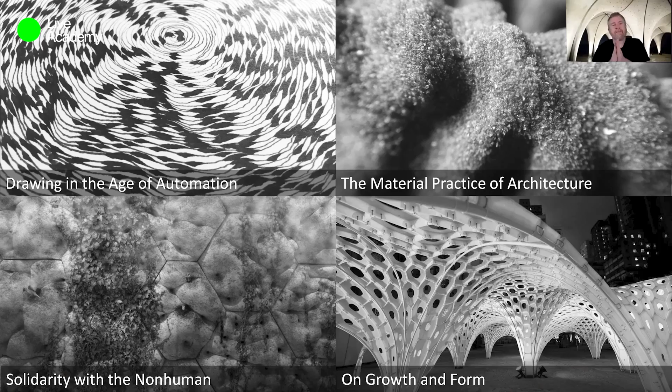So my lecture is divided into kind of 4 chapters that document some of my work over the last 15 years. So for each of these topics, I'm going to try to trace a disciplinary concern through my teaching and my professional practice.

And try to trace how my ideas have changed over time, often due to collaborations with people like Riyadh, or conversations I've had with my colleagues or students. So I'm going to start with drawing in the age of automation. I never would have predicted that I'd have anything to say about drawing.

25 years ago, when I was first starting my first architecture degree, it was actually my lack of drawing skills that pushed me towards computation. Compared to my peers, they were all able to draw fantastically well with a pencil or pen, and I was incredibly sloppy, and my drawings were always wrinkled and smudged, and no matter how hard I tried to draw cleanly and beautifully, I felt like it was a disaster.

At the time, there were like 3 computers in the basement of the architecture building that I was in, and I saw maybe a way through computation that I could catch up with my peers, that I could have cleaner drawings and things like that. And it was interesting to go through that process early in my education, and now be returning to drawing over the last few years as a way to think about how I teach parametric tools, but also how I can think through different computational ideas within my own work.

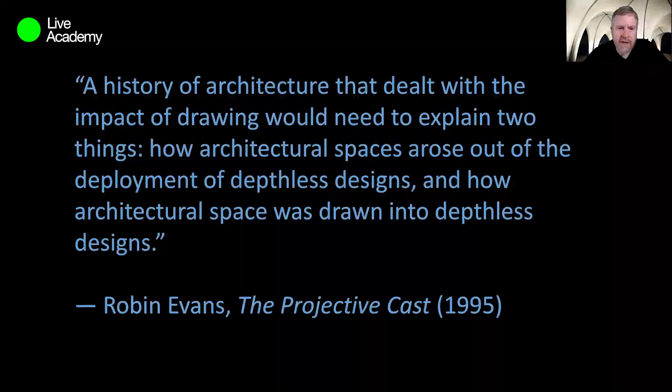So for hundreds of years, the way that we worked was primarily through the parallel space of projective drawing: plans, sections, and axonometrics. And that tension that Evans is talking about was the primary tension of our work, that drawings allowed a certain abstraction that let us deal with higher level ideas within a project, but at the same time we had to collapse all of the complexities of architecture, of view, perception, materiality, light, all of that into the 2D drawing as we were working.

With the advent of CAD software in the last few decades of the 20th century, I'd say the fundamental act of drawing was relatively unchanged despite the new and different tool set. Basically, using AutoCAD didn't really add anything. It made drawings more efficient, so you didn't have to redraw a drawing when you made a mistake. You didn't have to erase things in the same way. But it didn't really change, I think, the fundamental thinking behind drawing.

But only as digital modeling and more recently building information modeling have become the dominant methods used to design architecture, has architects' relationship with drawing radically changed. After centuries of drawings being the essential mechanism to generate and critically engage architecture, we're at a moment where drawings might exist only as an output of production, if even that. Within a model-based design paradigm, the construction of drawings has either been bypassed altogether or been uncritically outsourced to algorithms. What I mean by that is, maybe we still have to produce drawings, let's say within a Revit model, but the drawings are being produced by an algorithm that we're not really critically engaging.

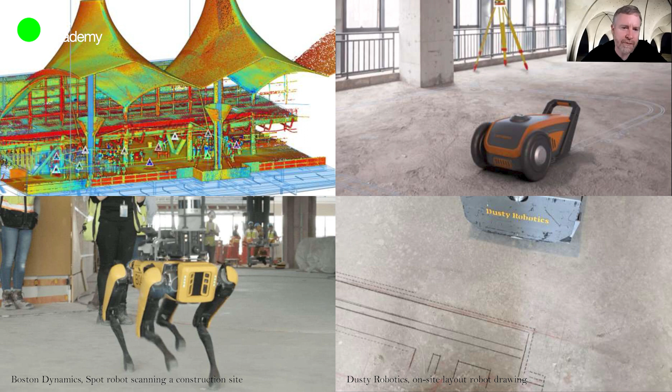So in this void, what is the agency of drawing within the discipline? In other words, why do we draw, or should we draw? Freed from the complex historical relationships between drawing and building described by Evans, should we simply create buildings without drawings, as many have suggested? Or might the very technologies that have enabled this freedom be re-examined for their potential to critically engage drawing as a generative and creative act?

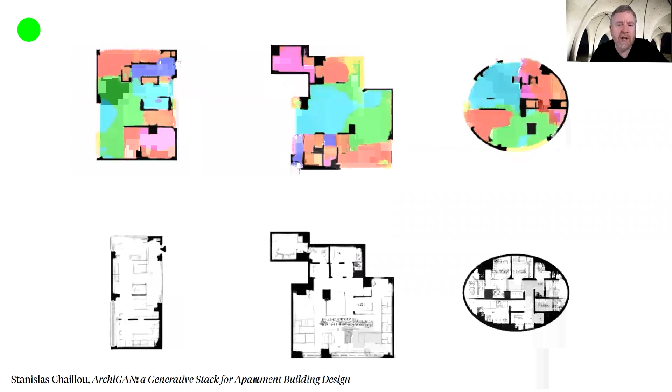So before we get into how the profession might re-engage drawing in relation to computation and automation, I think it's necessary to back up a little bit and talk about the ways that different academic institutions have engaged drawing through the prevailing pedagogies of computational design. So if we work through these, I think it's precisely the frustration that I have with these pedagogies that has led to several of the projects, which I'll show in a few moments. So I see 4 primary ways in which computational design is taught in universities today.

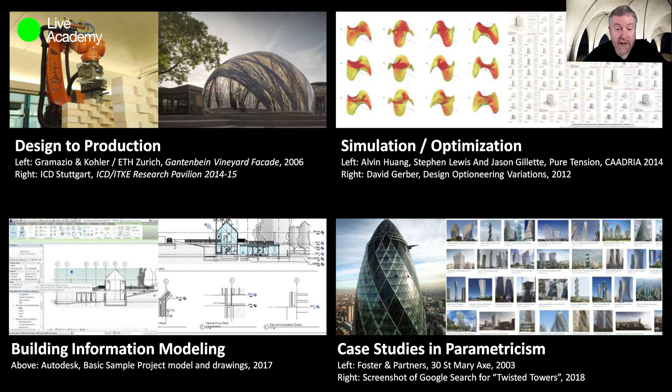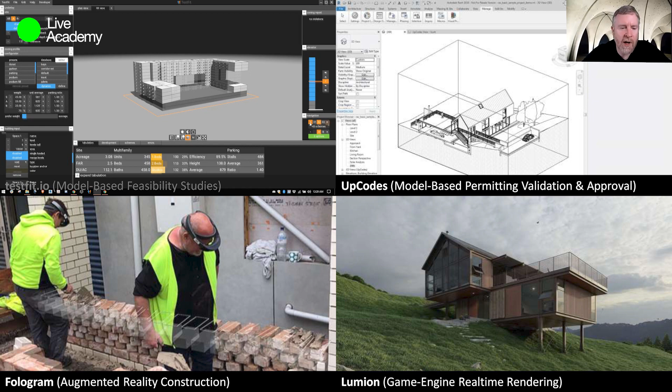Moving on, in the lower left, Fologram is developing augmented reality-based tools that could one day eliminate a contractor's need for drawings. Rather than contractors referring to either digital or physical drawings, they will be able to virtually see the building's model on site. And then finally, game engine-based rendering platforms like Lumion or Twinmotion, which through their speed and realism have become the go-to tools for communicating with clients over far more abstract drawings. So again, why do we draw, or why should we draw?

And how might drawing be productive in the age of automation? So Kelly Bair, one of the contributors to the first volume of the Drawing Codes show, which I co-curated in 2017 with Adam Marcus, has discussed how drawing, rigorously and intensely pursued, maintains a sense of surprise and innovative discovery. Quote, "The drawing becomes a catapult for invention, leaving behind the expectations of convention, buildability, or financial burdens.

Drawing is a proto-document of something that is not quite finished, an act still underway in the eye of the author." In this respect, drawing might capture the abstract logic of an idea better than any other form of media.

About 9 years ago, I changed my teaching methods for computational design from one based on famous case studies in contemporary architecture to one based on case studies from mid-20th century art and computation. This was based on a conversation that I had with a student who, when I suggested that he should use Grasshopper to complete a part of his project, told me, "Oh, I never learned Grasshopper because I don't like twisting towers." At that moment, I realized that my computational design pedagogy had failed to convey the rich capabilities of the tool, and many students simply thought that the tools were only important if one was interested in parametricism as a style.

I was actually coordinating the curriculum, and I knew that all of the students had already gone through a series of classes on digital modeling, computational design, and so forth. So to have a student say, "Oh, I never learned those tools because I wasn't interested in a particular style," although I was sad for that student, I also realized it was actually my fault that I had not conveyed the importance in the proper way. I thought that if I and other faculty members taught, like, "Oh, here's this cool twisting tower," they would all see the value of the tools based on that specific case study. And many students were simply turned off by the tools because of the relationship with certain types of architecture.

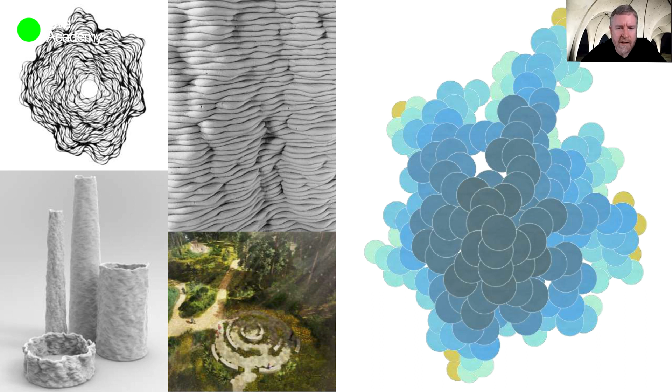I've used this particular computational sketch over the last 3 years to make robotically drawn ink drawings, ceramic 3D printed vessels, concrete benches for a forest cemetery, and a proposal for a rug for Louis Vuitton. In the same way an architect might return to a parti diagram repeatedly to mine new opportunities, I try to mine the generative capacity of algorithms.

So for that Drawing Codes exhibition that I mentioned with the Kelly Bair quote, in addition to co-curating the exhibition, I also contributed a drawing myself. I was developing the drawing in the tense period between the 2016 election and Trump's inauguration in early 2017. And I wanted to explore in my contribution how I could use computation to help generate and represent a counterfactual walled city.

Trump's constant ranting about the wall was chilling, disturbing, and reminded me of a medieval warlord. Obviously, the wall is an architectural device traditionally used to divide people and territory. Trump's talk of the wall reminded me of these maps of walled cities, and I began to wonder if I could script a wall to simultaneously become territory and city. So rather than dividing the city from the territory, how could the wall be simultaneously both of those things? What could a city look like if it was wall and nothing else?

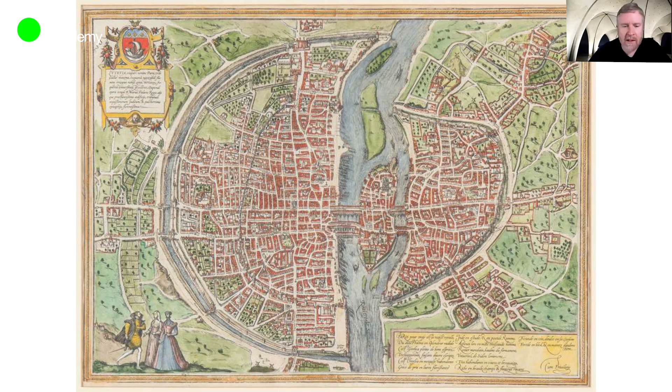I've been fascinated with walls that have grown thick enough to be buildings in themselves. So I started a computational sketch that slowly increased the wall's length while preventing it from moving outside a site or intersecting itself. At a certain point in the growth process, the wall takes over the entire site. There's still an inside and an outside to the wall, but sometimes the outside is deep inside the site boundary or vice versa.

At that point, I was left with a big squiggly wall, but realized that I needed some sort of roofscape to make it read as a city and not just a thickened line. I also wanted to push myself to learn new tools. The goal was to produce a sketch that was believable enough with the help of automation to spur questions about the nature of walls and their possible use to confuse sidedness and to unite rather than divide a community.

That's when I turned to Google's autocomplete feature to give me suggestions on what programs a rooftop might support. I worked my way from A to Z, pretty much accepting whatever suggestions Google autocomplete gave me when typing in the word rooftop followed by the letters A through Z. And I started designing parametric definitions that could implement that program on a number of different random sites along the wall's rooftop.

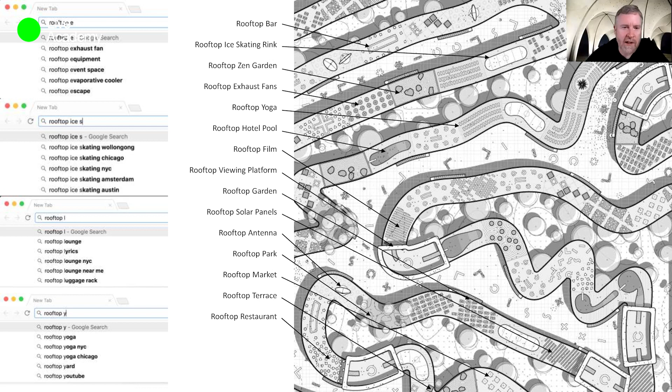So I would type in rooftop I, and then I'd have a list of different words, and sometimes I didn't have anything that was architectural, so then I would type rooftop IA and rooftop IB and rooftop IC, and I would keep iterating through the first and second letter of the word until I found a list of words that were architectural in some way, and then I would choose from that. So in the end, a rooftop ice skating rink was one, and you can see a few of those and how they morph depending on the snaking of the underlying wall.

Last year, Adam Marcus and I had the opportunity to experiment with these ideas further with students during a one-day workshop at the University of Miami. These students were everything from 18-year-olds in their first week of architecture class to graduate students in architecture. Using pre-built scripts provided to them, we asked students to develop a seed algorithm that would produce a basic block pattern. Buildings, trees, and crowds would then populate the city automatically.

Students would then iterate through how the changes in the base seed pattern would result in massive changes in the whole urban pattern. Finally, we asked the students to work backwards like archaeologists to hypothesize on what political, cultural, geological, or economic systems might have led to their generated cities. The goal was not to become urban planners. Instead, it was to understand the biases embedded within the base geometry of our imagined cities.

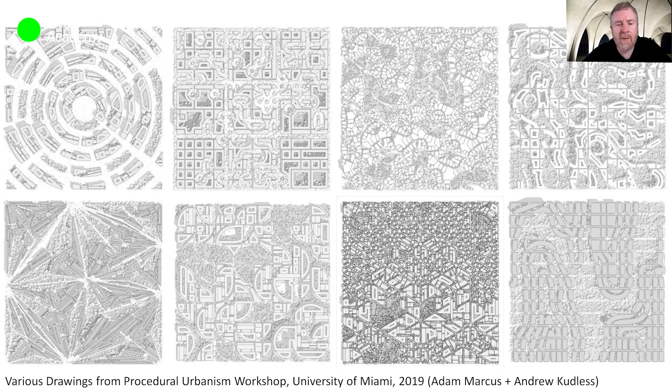All right, so that's the end of the first chapter. The next chapter of the lecture is on the material practice of architecture. So after I finished my first architecture degree, I think in 1998, I lived in Kyoto, Japan for a year. And I don't know where all of you are in your degree or if you've graduated already, but like maybe some of you, after 5 years of being an architecture student and living kind of the life of an architecture student, I wondered if architecture was actually for me.

As many of you know, the way that architecture is taught, unfortunately, is kind of punishing for a lot of individuals, and it's almost like a military boot camp sometimes, it feels like, and you feel like you're being pushed to the mental and physical limits. And at the end of those 5 years, I was actually quite skeptical if I wanted that as a lifestyle or as a career choice.

And while I was living in Japan, I actually had kind of decided that architecture wasn't what I wanted to do. And I decided to pursue a degree in traditional carpentry, Japanese carpentry. And I decided I would try to spend the rest of my career in Japan. Unfortunately, that didn't work out with the visa requirement, and I actually had to return home to the US. And that was kind of heartbreaking for me. And I had to kind of figure out, now that I'm back in the US, what do I do? And I ended up coming back into, let's say, the fold of architecture.

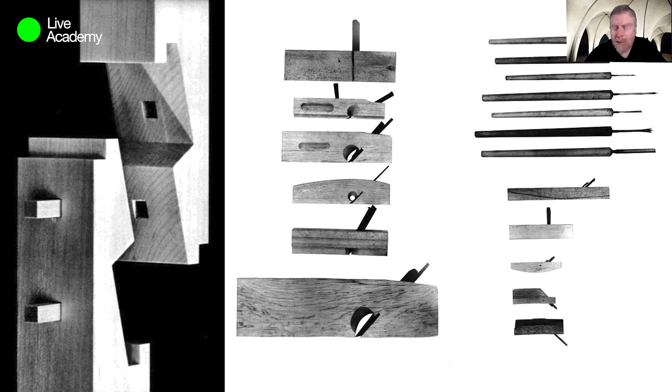So this idea of learning the tools and materials of your discipline before engaging in the production of the discipline stayed with me after I came back. I became fascinated with the diverse group of architects who seemed to have focused deeply on specific material systems, such as Eladio Dieste in Paraguay with bricks, or Uruguay, actually, I should say. Frei Otto with fabric, Felix Candela with concrete, and Prouvé in France with sheet metal. Some of these practitioners embodied the historical archetype of the master builder, in that they were not only the designers of the structures, but also sometimes the general contractors.

At the same time, in my teaching, I had become frustrated with the methods I was using to teach design. I realized I was simply repeating the ways that I was taught and had been focusing on site and program as the sole generators of design concepts. We are all familiar with the studio model, faculty introducing a site and program during the first weeks, followed by weeks of site and program analysis. At some point, there'd be some mysterious magical moment that a concept would develop out of that analysis, and then students would pursue that concept based on their analysis of site and program for the rest of the term. And so that's the way I was teaching. And the resulting projects of my students were good, but they also felt kind of divorced from the material realities of construction and the possibilities available when one starts from a specific material system as the design generator.

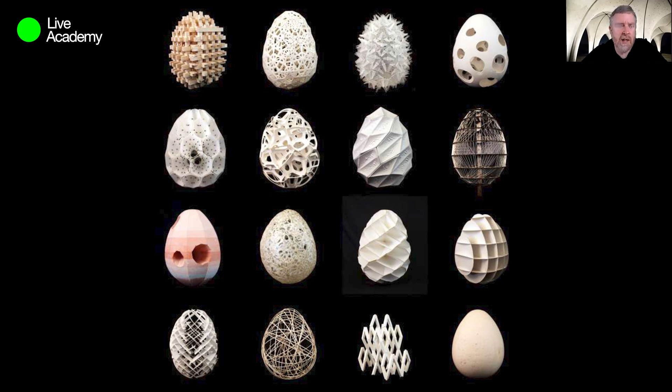So in 2014, the frustration was too much for me, and I decided to flip my studio teaching around such that I would ask students to choose one material or one way of making and produce 5 large egg-shaped objects over the first 4 weeks of the term. Only after they had blundered through the first couple of attempts would they begin to understand the craftsmanship required to work with the material and gain fluency with it. At that point, I would then introduce the program and the site, and then they, with their new material knowledge, would begin to apply their material system to the design problem.

So the reason I did this is that I realized that the way that I was taught, and the way that a lot of my peers were teaching, was based on this model that site and program were the sole generators of concepts. And I realized how incorrect that is.

If you look at any famous architect, they all have their biases. There are often material biases, that they tend to use certain materials, or that they tend to use certain systems of grids or generative logics, let's say, based on material systems. And they repeat the working through those material systems project after project after project.

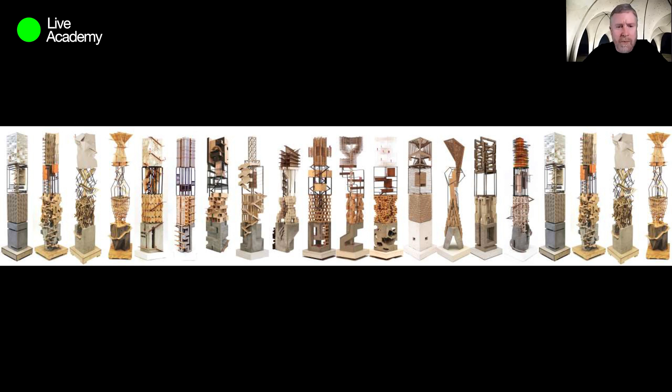So in 2015, I was asked to revamp the MArch Studio One studio, basically the first studio that students take at the California College of the Arts. These are students who are new to architecture. They're graduate students, but maybe they had a degree in chemistry or English or whatever before. So they're older students, but they are new to architecture.

And I've loved teaching the studio over the last 5 or 6 years, because it attempts to introduce students to the material practice of architecture through hands-on experimentation. The term was divided into 7 2-week assignments that explored the relationship between material, form, and performance through full-scale assemblages and large drawings that together built what we referred to as totems.

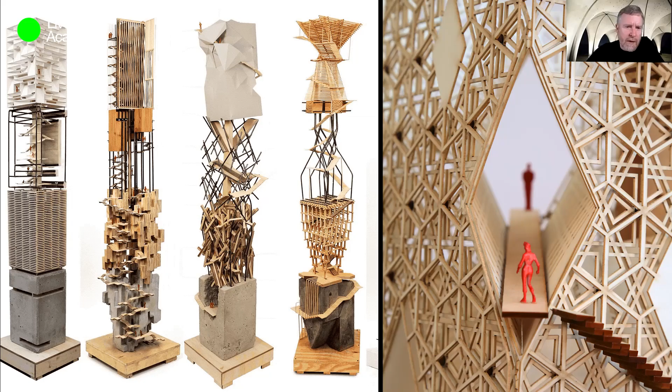I wanted students to discover design opportunities that only come out of a deeper understanding of working with their hands, with concrete, wood, steel, and plastic or paper sheets. I wanted students to gain a deep respect for the labor of architecture and the laborers who make it possible. That is, despite what we often think in popular culture, that architects build is not really true. We make models and drawings and instructions to build.

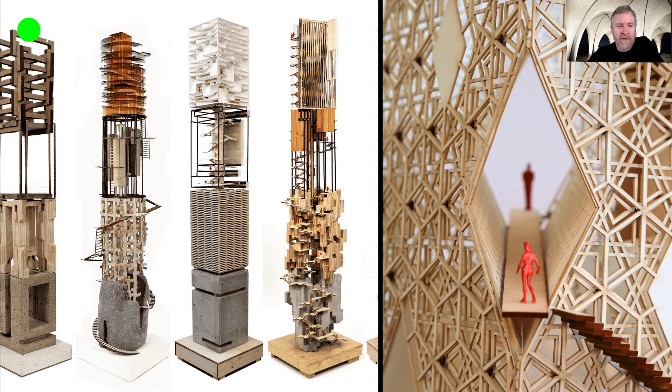But obviously there's a huge amount of labor from craftspeople of other disciplines that go into the actual building of architecture. And I think often our education is so divorced from the labors of producing buildings, not producing architecture, but producing the actual building, that we often don't understand the importance of that knowledge of often generations of laborers, and how they have been trained in a certain way of making.

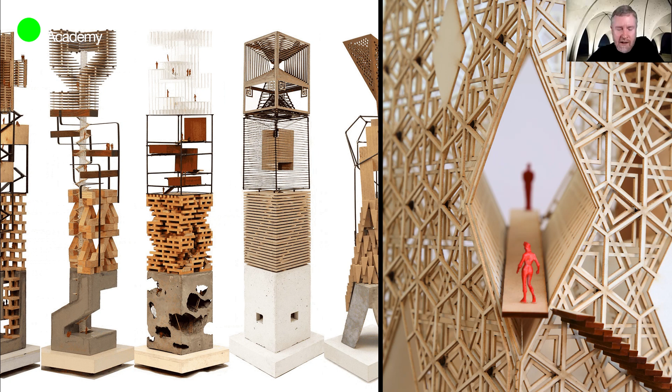So having students in their very first day of class learn how to cast concrete, learn how to use a saw, learn how to use a welding torch, a laser cutter, and so forth, was really enlightening for me as a teacher, and as well, I think, for my students.

So in 2018 and 19, I also introduced an eighth topic to the studio, which exists as a kind of meta project throughout the term. 3 years ago, while finishing up Confluence Park, which I'll talk about later, with my colleague Tenna Florian at Lake Flato, I asked her what was one thing that she wished architectural graduates knew when she hired them.

I was expecting some sort of answer around a technical skill, like, oh, they should know Revit, or they should know this or that. But instead she said that she wished architectural education better prepared architects for collaborative design. Very few projects, she said, are completed in isolation. Most require interpersonal skills that allow architects to quickly jump on or off of a project and to build towards a collective goal.

As such, over the past 2 years, I've had students switch projects every 2 weeks while building these totems. Despite a lot of concerns that it would be a disaster, I was happily surprised how the projects were as good, if not better, than previous years of students working solo. Rather than each student being solely responsible for an entire project, they are essential collaborators of 7 different projects, and can take collective pride and ownership in producing a much larger whole.

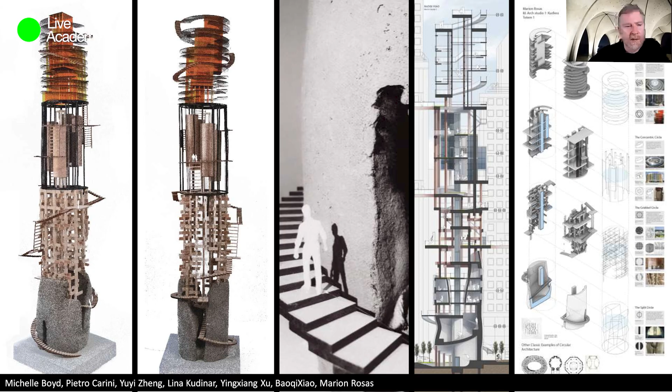All right, so moving on to my own practice and talking about material practice of architecture, I'll just mention 2 completed projects that have influenced my desire to put the material practice at the foreground of my design process. In 2015, I was commissioned by the champagne company Perrier-Jouët to produce an installation for their booth at Design Miami. Perrier-Jouët is one of the oldest champagne houses, and their founders amassed the largest private collection of Art Nouveau works in France. In fact, their own bottle was designed in 1902 by the glass artist Émile Gallé. I was asked by the company to reflect on their collection and produce new work inspired from it.

Two of the most prominent features of the art and design movement were its commitment to breaking down the distinctions between the fine and applied arts, and its use of sinuous curves drawn from nature. These fibrous strands, often representing vines, hair, or flowers, unify a work by drawing your eye across it. I wanted to work with a series of different strands to produce the installation, but it wasn't until I visited their vineyards, winery, and caves in France and the site in Miami that I began to form a material and spatial concept. My goal was to evoke the materials and processes used within the growing, processing, and storage of the champagne within the space at Design Miami.

4 materials were chosen from their site and process, and then developed into specific furniture or design objects within the space using a fibrous or strand geometry. Each of the 4 projects attempts to capture the organic flowing geometry of the Art Nouveau period, while also using contemporary tools and fabrication techniques. So I'll step through each of these 4 parts of the installation, starting with the screen. So there were 3 large oak screens that create a private experience away from the chaos of the exhibition hall.

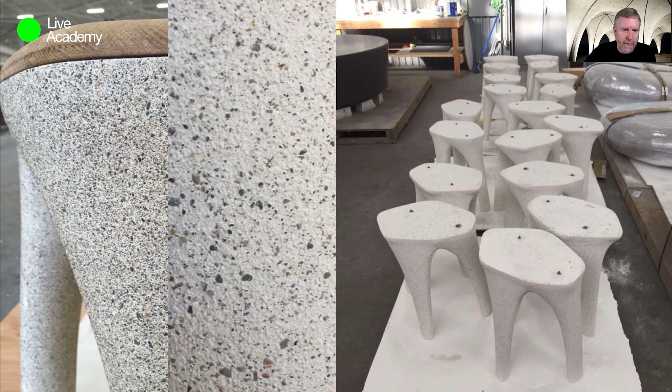So the irony of Design Miami, like I said, is that there are hundreds of chairs, but nowhere to sit. Each of the booths exhibit some of the most iconic chairs of the last 2 centuries, but no one is allowed to sit on them. For the Perrier-Jouet booth, I wanted to create an oasis where visitors were free to relax and sit.

Using the hand-carved chalk caves of the winery as inspiration, I worked with Concrete Works in Oakland, California, to create a series of 16 concrete stools that mimicked the natural beauty of the caves. Each stool was identical, but through the use of an irregular hexagonal tiling, they can be moved into larger benches.

It was great seeing how visitors could come into the space and actually be shocked that they could sit down. They would just look around and look like they were nervous, like, can I really do this? Is someone going to yell at me if I sit down? And that they could move these stools and rearrange them into benches or small groups, and take ownership in a way that they couldn't in the rest of the fair.

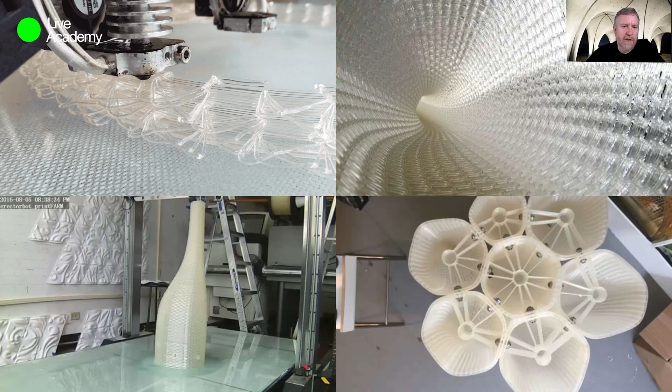For the central table, I worked with my friends Ron Rael and Virginia San Fratello, who I believe will be one of the other lecturers in the Live Academy series in another couple of weeks, from Emerging Objects to print 7 large flutes that aggregated into a luminescent cocktail table.

After being resistant to 3D printing for years, I was turned off by the black box nature of the fabrication process. I learned how to program the G-code directly, which allowed me to create a woven pattern of the bioplastic strands that reference the wicker baskets used during harvest time with the grapes. As the melting strands slump from one level to the next, they create a series of truss-like structures that greatly increase the stiffness of each leg.

Finally, I wanted the ice bucket to be the most closely tied object to the actual champagne making process. If you think of champagne as the liquid essence of the grape, I wanted the ice bucket to represent the solid essence of the fruit. I wondered what happened to all of the skins and seeds after the juice was squeezed from the grape, and I set out to get some of this material, as it is usually discarded or composted in the winemaking process.

Luckily, I found a startup in Sonoma, California, near where I was living, that was collecting the skins and seeds, drying them, and then grinding them into a gluten-free baking flour that they had just started selling at grocery stores in San Francisco. I acquired a few buckets worth of the Chardonnay grape skin flour, and again, working with Emerging Objects, was able to 3D print the ice bucket components.

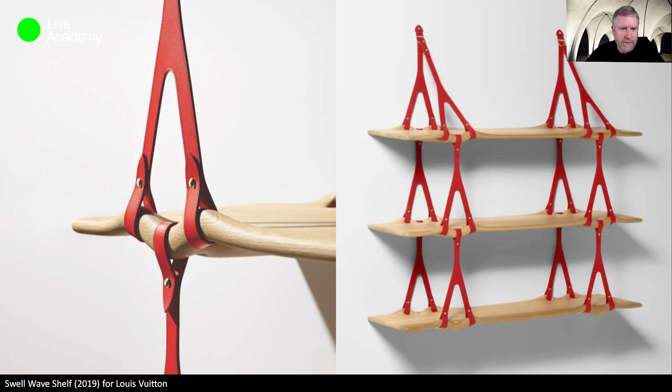The other project that I'll briefly mention in this chapter are the shelves that I designed for Louis Vuitton's Objets Nomades collection last year. My goal was to use the expressive potential of materials and fabrication processes to evoke my feelings on travel, the focus of the collection. For me, I feel pulled in 2 directions when I travel. There's the tension between the lure of the unknown with the pull of the familiar, an inherent conflict between the joy of the new and the comfort of home.

The shelf uses the strength of wood and the suppleness of leather to form a joint between the 2 materials that evokes this tension and equilibrium between being pulled in 2 directions. For the freestanding version of the shelf, I wanted to take this tension even further through producing material strangeness. The shelves appear to hang in space like the other version, but as your eyes move up, there is no apparent support. Through the use of 3D printing, we are able to produce slender aluminum branched columns that are embedded within the leather and are connected to the oak shelves through hidden joints made with a 5-axis router.

The third chapter of my lecture is named after the subtitle of Tim Morton's book, Humankind: Solidarity with Non-Human People. Tim Morton is a philosopher and writer, actually based here in Houston, Texas. So I'm using it as the name of this chapter, as it best describes a number of trajectories and desires within my teaching and practice.

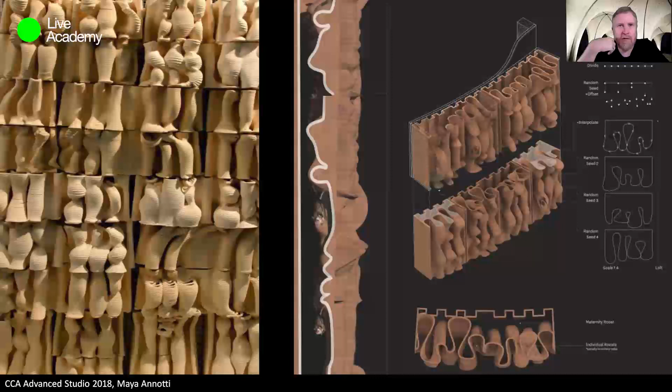So again, going back to the material practice of architecture from the previous chapter, the way that she was engaging the design of the project was first through the design of a brick using 3D printing ceramics. And that required her to understand the toolpath of the machine, which required her to understand the G-code that was required to run the machine, the consistency of the clay, to gain an inherent knowledge of how wet the clay had to be, or how stiff the clay had to be to produce the desired overhangs and curvature that she wanted. And to understand, would it crack in the kiln or not? And all of that was going into the design of the project.

And what we normally think of as architecture, the design of a plan and section and so forth, was in some ways meaningless to the project. It was really about the design of a detail that engaged the non-human world, and how architecture becomes a kind of facilitator of a larger ecology.

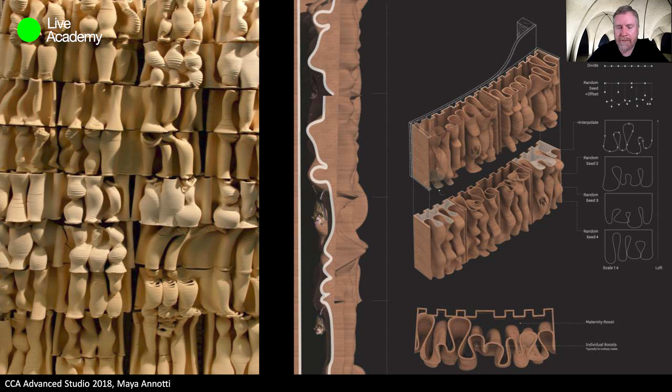And this term, in the University of Houston, Hines College of Architecture and Design, I'm teaching a studio that continues to explore these ideas within species native to the Houston region. The idea is to expand our understanding of who we design for, to include the life that surrounds us. We are living in their environment as much as they live in ours.

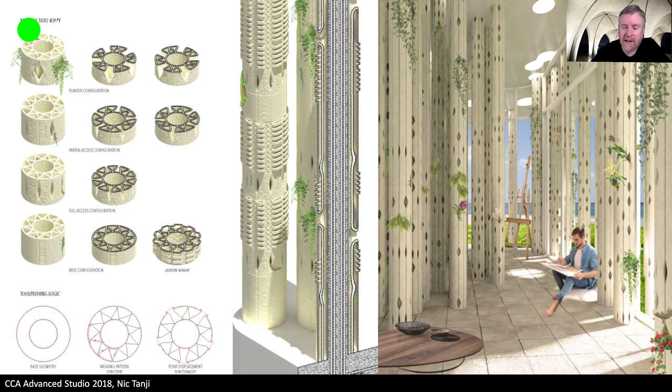So in my own work, I'll just briefly touch on this topic. My early exploration of non-human life primarily focused on biomimetic formal and structural systems that were inspired by natural growth patterns. Later on, I began to explore ways of fabricating components that use self-organizing systems to discover stable states.

The P-Wall series of projects was originally developed as a living facade system. However, when one version was commissioned for the San Francisco Museum of Modern Art, it became an art piece hanging statically in a museum. In response to that, I produced this alternative fictional version to help me envision my understanding of the project in its intended environment.

I wanted moss and lichen to grow on it. I wanted birds and insects to call it home. Although sometimes interpreted as an abstract melting of the white gallery walls, I wanted it to become much more alive and inviting to the life around it.

There is a resonance that the wall has with our own bodies. People are drawn to it. It looks soft, but is rock hard. And despite that, people want to feel and hug it. The wall and our bodies share geometries because we share similar material process.

But the human body is essentially a liquid interior held back by an elastic skin and held up by a compressive skeleton. The forms that emerged in the wall were the result of a similar interaction between the rigid frame, the elastic fabric, and the liquid slurry of plaster.

As a designer, one of the things I learned from this series of projects was to give up control to these other forces. That is, I learned that I was a better designer when I partnered with other life and forces in the design process. I could create things that were beyond my own ability to draw or model them.

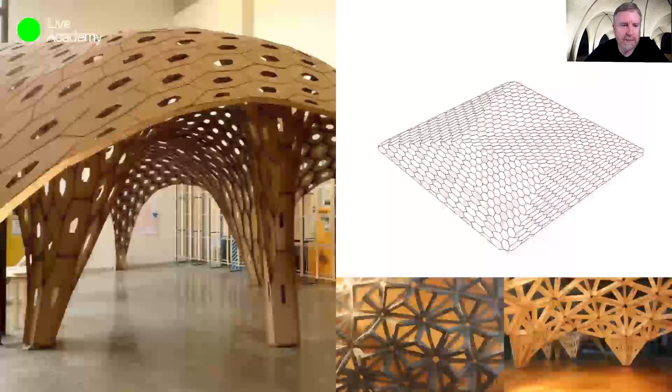Over the last 12 years, I began experimenting with ways in which fabrication data and structural performance could be integrated into the design process rather than something we simply addressed at the end of the design process.

In 2012, I taught a 4-day workshop at the University of Minnesota with Marc Swackhamer, where students developed a small pavilion made from $200 worth of cardboard. The amazing thing about this structure was that I was sure that it was going to fail. Only as the last few cardboard components were added to complete the structural flow through the thin surface did it become rigid.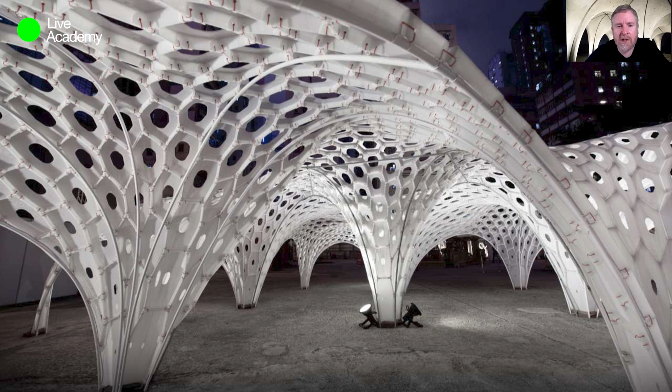Later that year, I collaborated with Riyad, the host of the lecture series today, in Hong Kong on the Shellstar Pavilion. The project was designed and fabricated over 6 weeks, and it was only possible through the tight integration of form, fabrication, and performance data within the model.

So this trajectory in my work led to Confluence Park in 2014 through 2018. I'll spend the rest of the talk discussing the design and fabrication process for this project. I want to begin by recognizing my partners on this project. Tenna Florian was the project manager at Lake Flato Architects, Chuck Naeve was the project engineer at Architectural Engineers Collaborative, and Josh Zabel was the project lead at Kreysler & Associates, who was the fabricator for the formwork.

I'll focus on the design, engineering, and fabrication of this innovative tilt-up concrete structure using fiberglass composite molds. The design was produced through a small but multidisciplinary team that valued the integration of form, fabrication, and performance through the application of biomimetic principles, computational design and fabrication, and original construction logics.

The BHP Pavilion is in San Antonio, Texas, and is the central outdoor classroom and community hub of Confluence Park. There were 3 primary project objectives that the pavilion needed to satisfy. The first objective was to create an educational space that could integrate the architecture of the pavilion with the client's mission to educate the community on the critical role of water in the regional ecosystem.

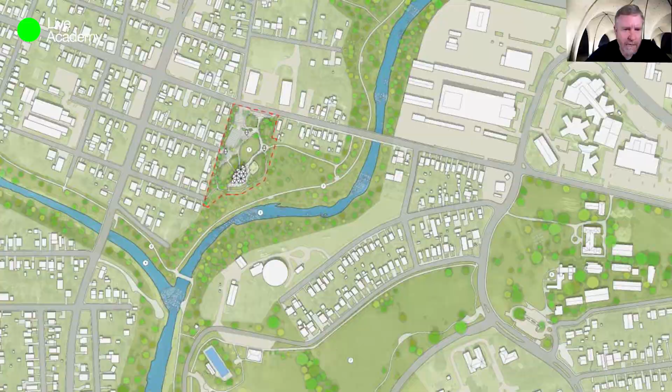The second objective was to create a unique and inspiring iconic pavilion to help catalyze a new identity for this historically underappreciated part of the city. The final objective was to use innovative fabrication technologies and methods to lower the overall project costs while meeting the client's ambitious educational and aesthetic vision.

While most structures attempt to visually minimize the shedding of rainwater, we decided to use the pavilion to celebrate the collection of rainwater and to make the form of the pavilion a pedagogical device for the park's guides and visiting teachers. So I should say that the program, like I said, it's an educational park, but I think 14,000 students have visited over the last 2 years.

So basically every day, a school group, school buses show up, school kids come out, and then their teachers and the park rangers teach students about the role of water in the Texas ecosystem. In this part of the world, there's very long dry spells, droughts, and then there are these incredible downpours that happen a few times a year where massive floods occur.

So the form that emerged from this process was based on the doubly curved fronds of many local plant species that cantilever out to collect and redirect dew and rainwater back to their root stem. The double curvature not only gives these cantilevers more strength, but also the curvature creates a channel on the top surface for the efficient flow of water.

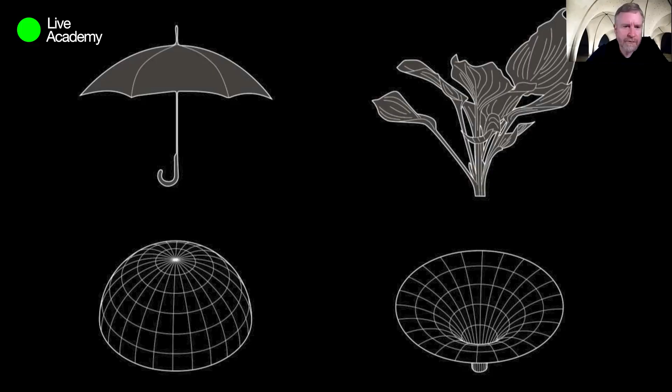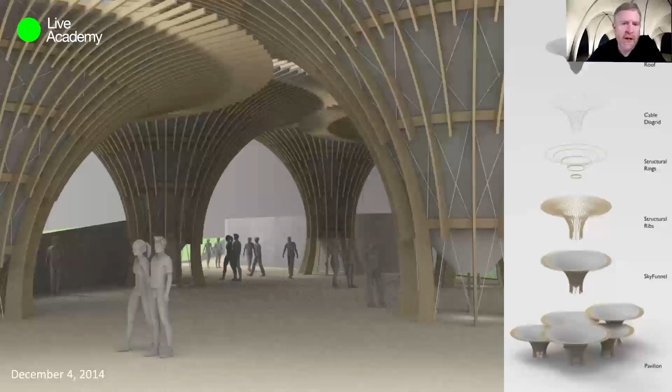Rather than design a singular large shell pushing water towards the structure's fringes, we started to design several funnel-like doubly curved forms that opened up to the sky and channeled the rain into an underground cistern where it is reused for the site's irrigation and toilets. Although the new doubly curved funnels aligned with the pedagogical mission of the client, the complexity of making these forms initially resisted easy construction strategies.

Early designs for the funnels involved complex steel and cable net structures, which, even if each was identical, were beyond the modest project budget. At this point, inspired by the work of Félix Candela and Heinz Isler and many others who had investigated the use of concrete to create complex forms that align with structural forces, the team quickly moved to concrete as the primary material. It became necessary to begin to divide the funnel shapes into discrete parts in order to break the forms into manageable sections, while also allowing views into the interior of the funnel.

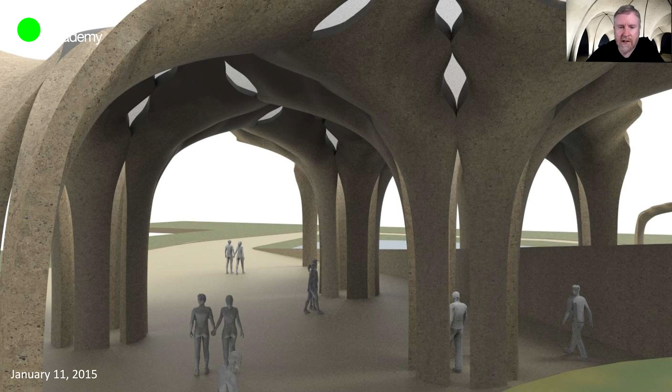However, while the earlier steel funnel shapes were designed to cantilever and be supported through tension rings that could balance the forces around the entire funnel, the discrete concrete parts no longer had this tension ring and required a new solution. The design team decided on a simple solution of pairing each discrete funnel part with a symmetric paired element to create 11 structurally independent arches.

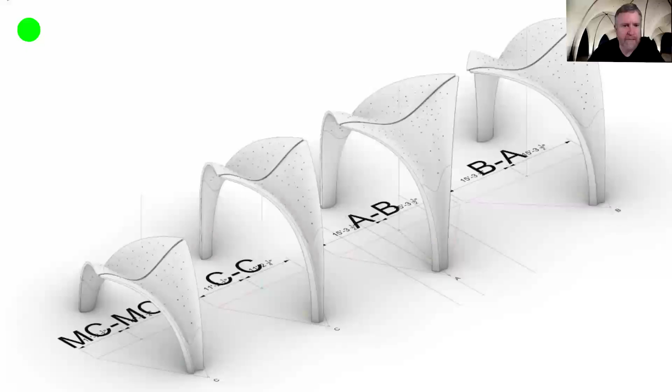The resulting arch is the simplest of structures, the statically determinate three-hinged arch. An arch structure plays to concrete's significant compressive strength while minimizing its limited tensile strength. Referring back to the biomimetic inspiration, each half arch was nicknamed a petal.

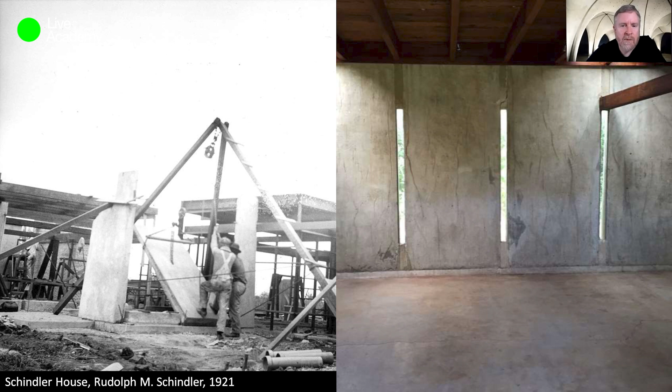An additional benefit to this new organization of petals or half arches was the idea of using a modified tilt-up concrete fabrication technique. Tilt-up concrete construction, famously used at the Schindler House in Los Angeles in 1921, is defined by concrete panels being cast flat on the ground on site and then lifted or tilted into place and connected to the foundation and adjacent panels. The technique can be considered halfway between cast-in-place concrete and precast concrete, as the panels are cast on site but not in place.

Thomas Edison, one of the early originators of the technique, stated the advantage as, quote, tilt-up construction eliminates the costly, cumbersome practice of erecting two wooden walls to get one concrete wall.

Also, I should note here in Texas and in many other places in the United States, tilt-up concrete, although it was used in 1921 for one of the most famous houses in the world, the Schindler House, now it's primarily used by Walmart and Home Depot and big box stores like that, because it's one of the cheapest fabrication strategies for building very large structures. So I think it's interesting for us to have used what here is deemed as one of the lowest forms of construction, one of the cheapest and, let's say, dirtiest forms of construction for Confluence Park.

So in the context of Confluence Park, tilt-up had a distinct advantage over cast-in-place concrete, as it more easily allowed for reusable molds, which could be erected in one place on site throughout the construction phase. That is, we didn't have to take the formwork down and rebuild it the way a traditional concrete structure happens; we could basically keep the formwork erected on site in one place and continue to cast these petals again and again. Each mold we cast, I think, roughly about 10 times.

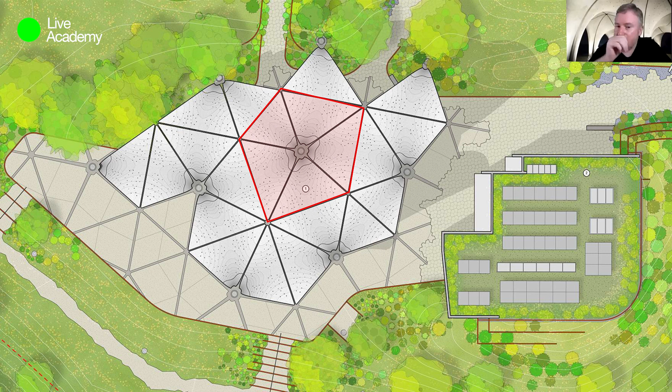The center of each pentagon represents the funnel drain, and the edges of the pentagon represent the apex of each arch. Each A triangle is paired with its mirror B triangle from an adjacent pentagon to produce a full arch. Similarly, each C triangle is paired with a C triangle from an adjacent pentagon.

In order to produce the final pavilion plan, various selections of AB and CC arches were explored and analyzed for the shade produced as well as the informality of the arches when seen in perspective. The design team tried multiple options of arch arrangements to produce a pattern that was both completely modular yet appeared irregular.

So what I mean by that, just to reiterate, it might seem self-evident, but if you use a grid in your project, the appearance of the grid will often be noticeable, right? It's very self-evident, but I think it's a problem in some ways. What I was trying for is, if we had arranged this in, let's say, a square grid or a regular triangular grid, it would have made everything modular, but when seen in perspective from the viewer, all of the columns would line up with each other, and you would immediately understand the regularity of the entire structure.

And there would be no surprises, let's say, in viewing it as you move around. When you view a regular grid from any point, it kind of looks very similar from any other point in the space. Whereas if you use an irregular grid, or something that's not a grid.

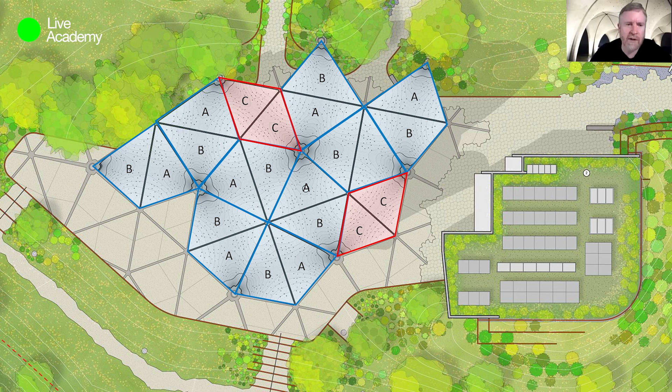So what's not seen here in this drawing are 3 other smaller pavilions that are each made out of 2 pieces, or 2 petals. So there's a total of 10 of the C petals, and I believe 9 of the A petals and 9 of the B petals. So roughly equal for all of the molds.

So in parallel with the selection of the specific plan arrangements, the sectional properties of the geometry were also being developed. For both structural reasons and water flow capture, the petals had to retain a double curvature. In order to test how water would flow on the petals, a rainwater simulation script was developed. The petal parameters were modified until the rainwater flows all ended at the drains at the base of each petal.

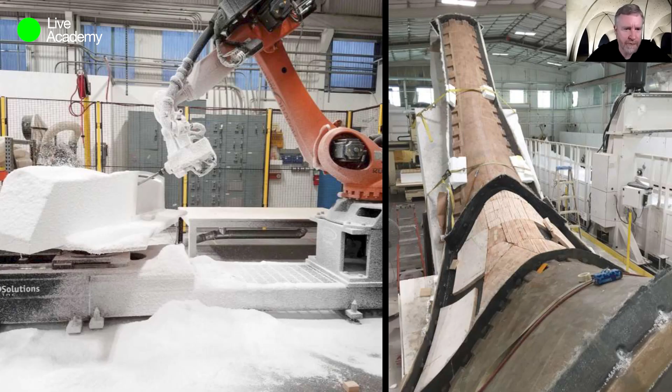Although a traditional wooden formwork technique was explored, similar to how Felix Candela made many of his structures, it was determined to be far too expensive and inaccurate for the project. Instead, we worked with Kreysler and Associates to develop a fiberglass composite mold. Historically, digital fabrication has been used in some of the largest and most expensive projects, while less expensive projects used traditional techniques. However, in this case, the traditional technique was far more expensive than the digitally fabricated fiberglass molds. In addition, the fiberglass mold was not only less expensive, but it was stronger, more durable, and more accurate.

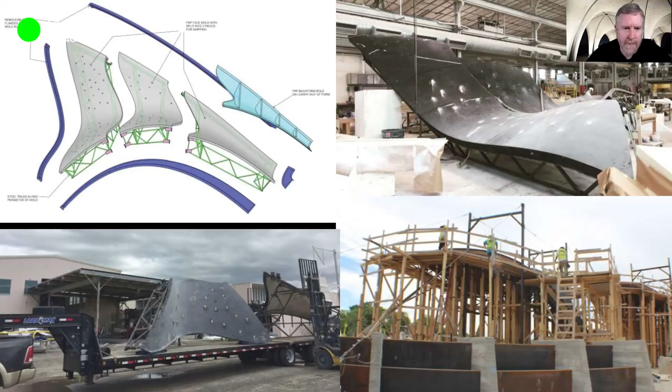The 3 formwork modules were fabricated off of 5-axis and 7-axis CNC milled EPS foam forms. After milling the forms, a 50 millimeter thick composite structure composed of inner and outer layers of fiberglass composite with a central core of balsa wood was applied. One of the biggest advantages of using this method was that the milled surface of the foam positive was highly accurate, and that all accumulation errors inherent to any fabrication process were always offset from this surface instead of working towards it, as would have been the case if a traditional method of cutting out ribs and laying plywood sheets over top of it had been used.

Due to the size of each full petal formwork, roughly 9 meters wide by 8 meters tall, each of the modules had to be subdivided into 3 primary subsections in addition to several side forms that could be shipped to Texas.

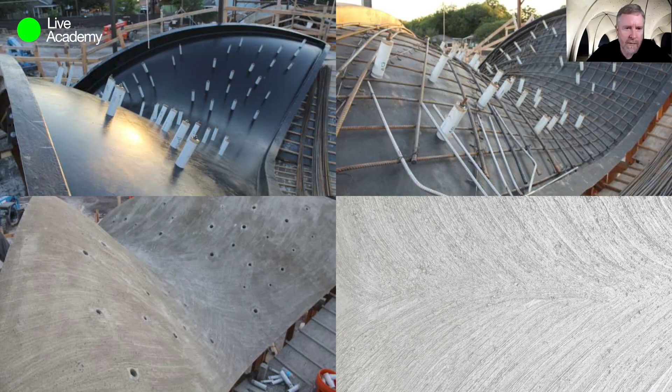After the formwork was positioned such that it could be cast as a modified tilt-up wall construction, the rebar was added to the formwork. The fact that the bottom surface of each petal was cast against the smooth fiberglass, while the top surface was cast open to the air, allowed the 2 sides of the petal to have radically different finishes. In addition, because only one side of the concrete had formwork and the top side was open to the air, it greatly reduced the cost of the formwork, whereas in a traditional formwork system, you have formwork on both sides.

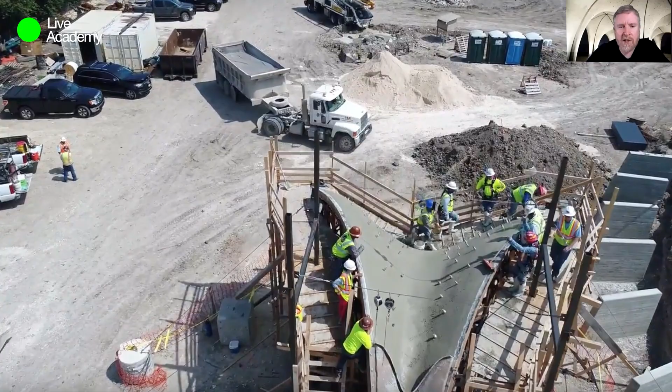In order to have the petals resonate with the flow of water, even when it was not raining, the open top side of each petal was broom finished with the direction of the broom aligning with the flow direction of the water. In the end, the 3 molds were used to cast a total of 28 concrete petals ranging from 20 to 36 metric tons each. Here you can see the construction workers broom finishing the top surface of one of the petals as it lays at a 45-degree casting angle.

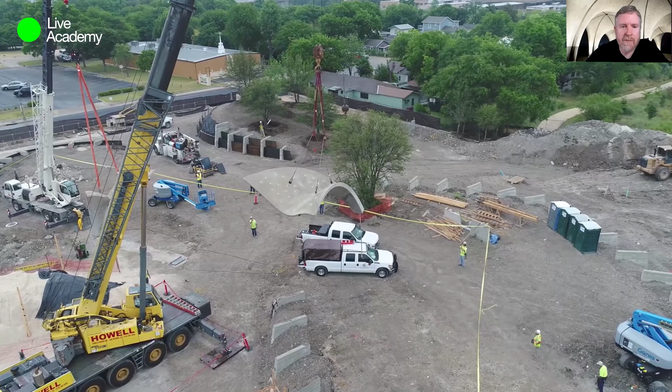Petals were cast in pairs, and 2 cranes were used to lift each petal from the formwork to its final position. As you can see here, the petal is both moved in plan and rotated in section by the crane, and then attached to the foundation and to its neighboring petal.

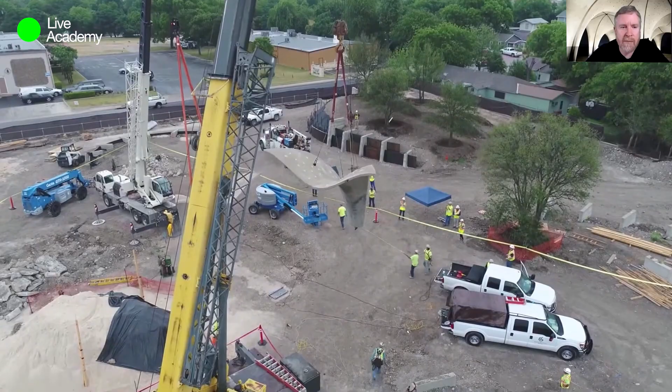Although the structure appears as a network of connected vaults, similar to many shell structures like the Shell Star Pavilion that Riyadh and I worked on, each arch is actually structurally independent. Not only did this reduce the lateral loads being passed between arches, it also allowed for more easily fabricating the entire structure from only 3 unique molds, which reduced the construction waste.

So like I was talking about with that cardboard shell structure, but also happened with the structure in Hong Kong, they are incredibly weak until the entire structure is complete. Because you're passing loads laterally through that skin, that makes the fabrication of it very, very difficult, because you essentially need to have scaffolding everywhere in the structure until everything is in place.

But in this particular project, we tried to solve for allowing each arch to be statically determinate structurally, so that it didn't rely on any lateral forces to hold it up. It was all self-sufficient, and all of the forces were resolving themselves down to the 2 column bases. And that allowed for much less construction waste. We didn't have to have as much scaffolding to hold everything up.

It allowed us to reuse the molds throughout the entire time, but it also allows the structure to evolve over time, and every structure moves over time as the ground underneath it settles. With this project, one of the big concerns we had was when we had it as a continuous, structurally interdependent shell, if one foundation piece settled differently than another foundation piece, cracks would start to form across the shell.

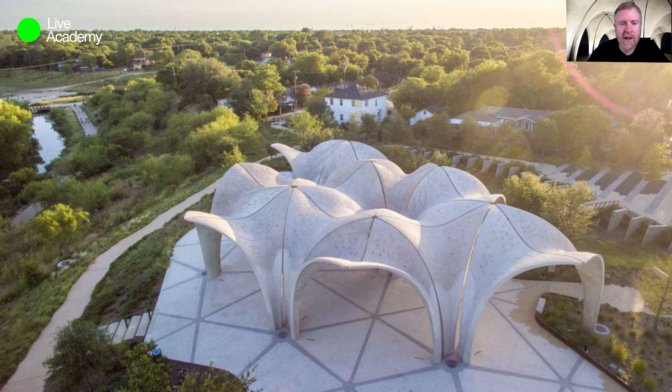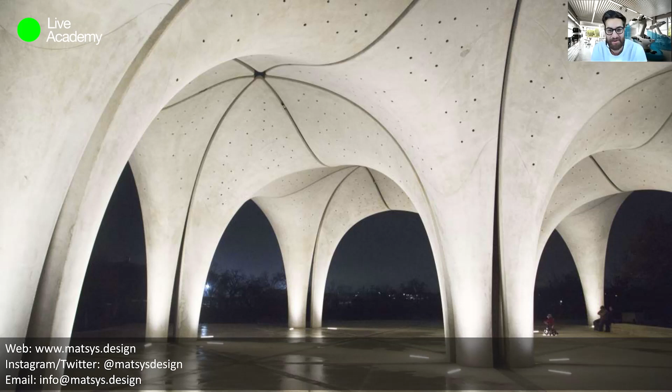Thank you so much, Andrew. That was wonderful. It was really great to see all the great work that you've been putting out from your studio, explained by yourself, and your journey to get there, the process and the concepts behind the work. And I really enjoyed the section on drawing.

It reminded me, I'm actually reading The Alphabet and the Algorithm by Mario Carpo, and it reminded me of a section in the book which talks about authorship. In this section, Carpo talks about Alberti's treatise on architecture and how he argued that the authorship of a building actually belongs to the architect, because architects have authorship over the drawings.

And past this point of no return, where no further changes could be introduced to a project, the builder takes on the notations, basically, of architecture and makes them into a reality. So the building itself takes form past the drawing stage and becomes almost something else.

How do you feel, from your standpoint, as an architect? And I hope that the audience is okay with me starting with the first question. I was so excited to ask this question and to get your opinion on it.